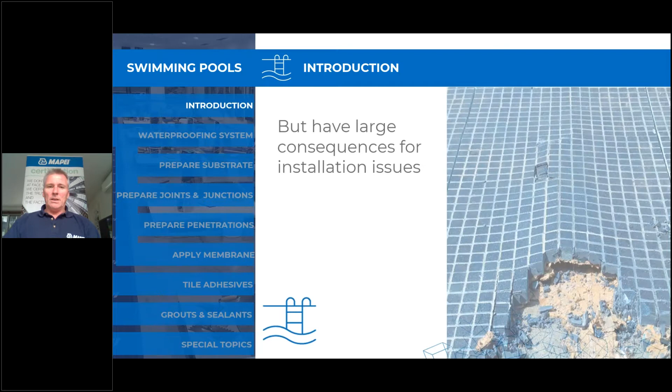If you do the pools wrong, there's certainly some big consequences to face. Not so bad in a backyard pool, but you can see this example here where the pool was done incorrectly in a high-rise or rooftop pool on the Gold Coast, and it flooded down 6 floors below. Many of the places were uninhabitable for the time being. So you can imagine the cost or the ramifications of having something go wrong.

You can imagine the ramifications even for us, having been involved in casino pools and hotel pools, or even residential towers. So if they go wrong, there can be certainly massive prices to pay.

We're going to cover off today the waterproofing system, then we're going to go into the tiling system or the tile adhesives. We'll talk about the grouts, we'll talk about the sealants that are used, the flexible sealants. And then we'll cover off just 4 little special topics that we thought were relevant to this series.

So we'll start off with the waterproofing system. The aim of the waterproofing layer is, of course, to prevent water from escaping from the pool. It prevents water from getting into the shell, where it can affect or corrode the steel structure. And it also can be put into place just for efflorescence control as well.

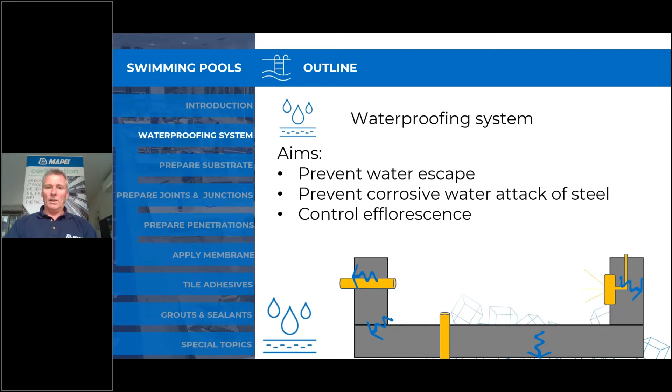So we'll talk about today in this area: the substrate preparation, the treatment of junctions and joints, the treatment of penetrations, and then the application of the membrane itself.

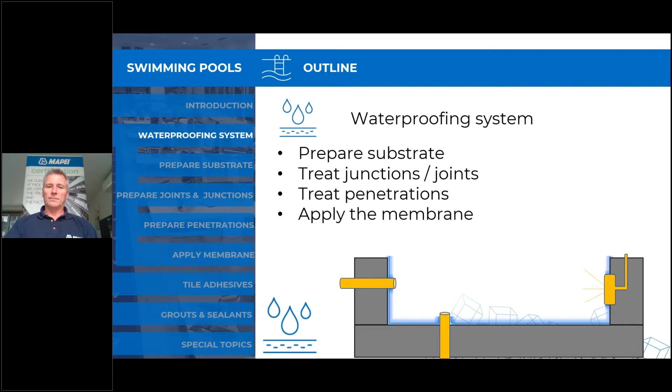In preparing the substrate, the concrete must be sound and well cured. There is various thoughts on the curing time of concrete. We work on the normal standard of 28-day cure time, but it does alter when we're talking about the big commercial pools, like the 50-metre pools and so on. So there is a variation - it can be 54 days for internal pools and 72 days for external pools. But we mainly work on the average of 28 days.

The preparation of a new swimming pool is obviously different to the preparation of an existing one. We remove all sharp edges or any kind of protrusions that's going to alter the thickness of the membrane itself - any rough concrete, concrete debris, anything where the membrane looks like it's going to have to go up and over, we certainly want to get rid of. High pressure water jet to remove any surface contaminants and also to provide the profile that we're after.

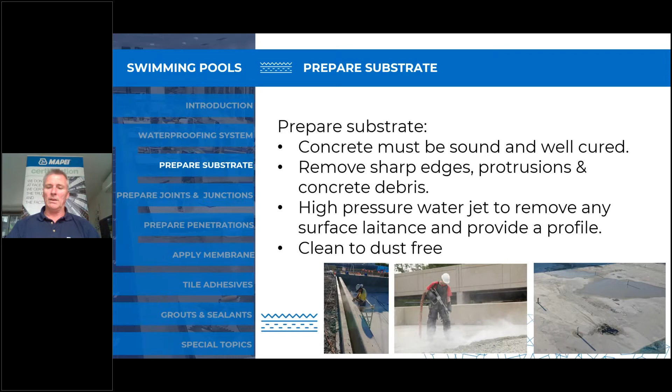And then the area should be made clean and dust free, especially when grinding has taken place. It's extremely important to make sure you've got the area dust free, because grinding can fill the pores of the concrete with a layer of dust.

So we would patch holes and smooth the substrate to allow for that uniform thickness of the membrane, as we said. We don't want to go up and over anything that's sharp, but we just don't want to go up and over anything anyway, because it alters the thickness of the membrane - where the membrane's transitioning on a flat surface and then has to go up and over, say, a lump of concrete or any other type of area where it's dipping down.

So if the existing tiles have been jackhammered off, in particular in the domestic scene, most pools are sprayed, so they're quite often quite an open surface that we're dealing with.

So the membrane, while it can go in and out and up and down and all over, it does alter the actual thickness of the product itself. So it's best to have a nice, smooth, plain surface to deal with. We'd smooth off with various different types of products. It can be done with sand cement render, of course, but in the bagged form we have a product, Planitop Smooth and Repair, or the Planitop Fast 330.

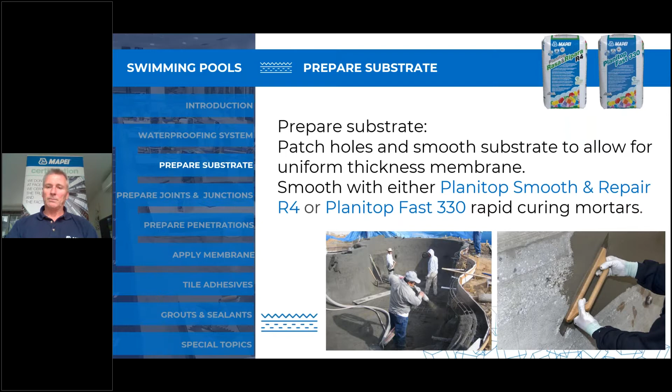When it comes to the floors, if we need to create a flat floor, quite often renders and or screeds are put into place to make the pool itself fit, or to have the tiles placed without too many cuts. Especially when using glass mosaics, it's a good idea to have the pool worked out as close as possible to getting a full tile in all areas, so we don't have any sharp edges of glass mosaics. Any form of tile can be sharp.

So we have our engineered screeds, again a bagged product, factory blended. We have the rapid setting version of Mapecem Pronto, and our normal setting version of the Topcem Pronto. So we render with the Smooth and Repair, and screed with these Mapecem or Topcem Prontos. The beauty of these products is they're factory blended, so we know we're getting a uniform blend every single time. A lot of the time with site blended renders and screeds, we're dealing with variation.

A traditional sand and cement screed or render finishes or dries up at around 12 to 15 MPa. With our pre-blended products, we can be anywhere from 21 up to 50 MPa, depending on the product you're actually using. So it's a stronger and safer recommendation to use the factory blended products, but pools have been rendered and screeded with sand and cement for many, many years.

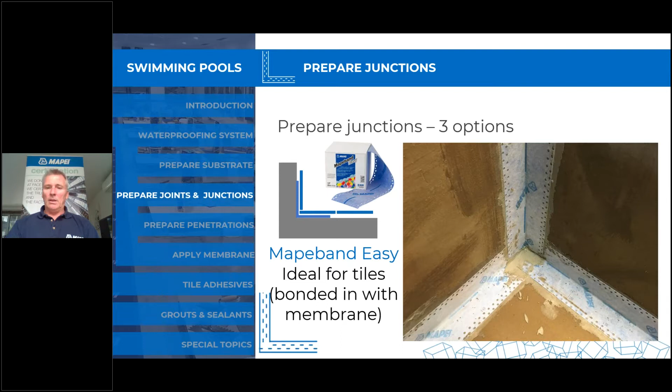The other option - I'll go through what happens a bit later - is the traditional way, using a polyurethane to create a cove fillet. That cove fillet should be around the radius of a 5-cent coin, so normally around 12 millimeters up and down. And then we would always put a fabric or some form of mesh into the first layer of membrane covering that junction, so we've got that bond breaker scenario going on.

As I said, these are the traditional way, but in a lot of cases when we're using a mosaic, either ceramic or glass, we need a tighter corner. So in modern times, we've got the felt type tape I talked about, that we can create a nice 90-degree angle with. But this method is still very much used, and when using a ceramic tile - the traditional pool tiles - they don't have to worry so much about getting tight into that corner.

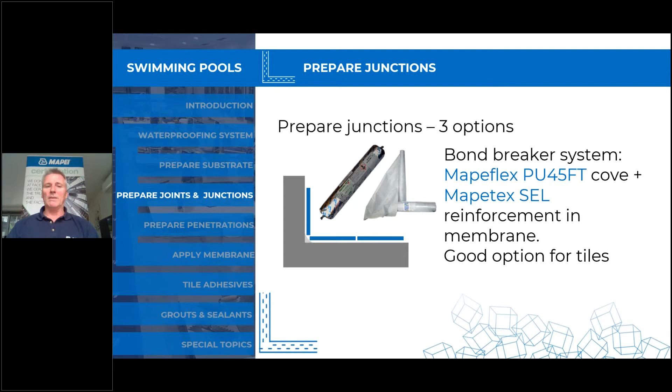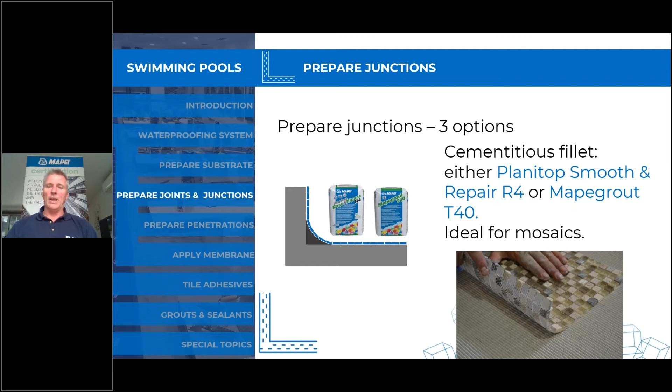The third option is really to create a cove with a cementitious product - that Planitop Smooth and Repair we mentioned before, or we can go into our construction grouts, the Mapegrout T40. This is ideal when they're using a mosaic and they don't want that tight look, the 90-degree look, where they want to actually cove the corner. It also helps the membrane transition more nicely into that corner - it doesn't have to change direction as such.

The felt tape we talked about, the Mapeband Easy, we also use it for dealing with movement joints. The less problematic joints are just the saw cut joints, and for those we use the Mapeband Easy. It's bonded into place using the same membrane we're using to membrane the swimming pool. That membrane is applied onto the structure, the felt is pushed into the membrane, and then we membrane back over the top of it as well, so it's sandwiched between two layers of membrane.

One advantage of this product is that it has a line manufactured into the center of it. It's a good idea to line that up with the saw cut itself and leave it exposed, so we know exactly where the saw cut is and can mirror it up into the tile work. You shouldn't be bridging control joints or saw cuts in any way - they should always be mirrored up into the tile work itself.

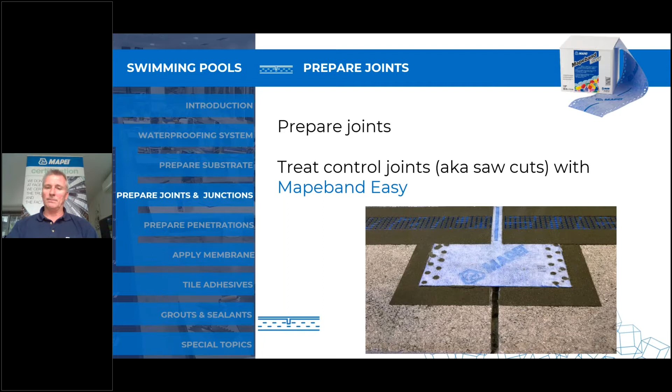Structural joints are a different thing altogether. They're a much more final joint - they allow for the whole structure to move. We deal with them in a different way.

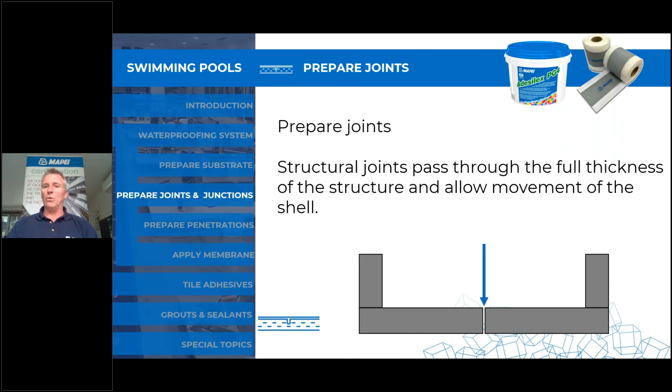We use what we call a gasket type tape - you can see it in that picture. It's called Mapeband TPE. It has a center made out of basically a plastic, very flexible, but we also loop it down into the movement joint itself, and it's locked into place with the Adesilex PG4 epoxy adhesive, as you can see in that picture.

In dealing with that, we prepare the joint, make sure it's nice and clean and free of any rigid debris, because there's no use doing all the detailing above the joint if the joint is full of debris and isn't going to move and act the way it should anyway. So it should be nice and clean.

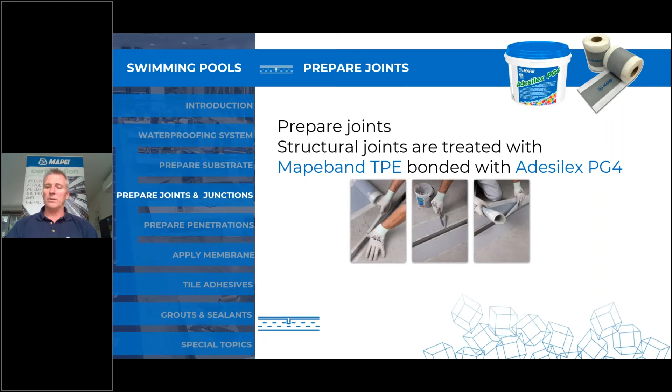We put the epoxy down onto the substrate, then place the TPE or the bandage into the epoxy - there's felt on either side. Depending on the movement that's anticipated, we loop the center down into the construction joint itself. The center of this tape is actually waterproof in itself, so we don't have to worry about that, but it has to control the movement that's going to take place.

As a rule of thumb, I always recommend that the loop in the center is twice the expected movement. So if we're dealing with a pool set on springs, and we expect it to drop 8 millimeters once we fill it with water, I'd expect that TPE to be looped down into that joint around 16 millimeters, so that it's never under tension.

So if the joint wants to open up, or the pool and the structure want to move independently, it's never actually stressing that tape itself. Then we put the epoxy over the top of it again, similar to what we talked about with the felt tape, sandwiching it between the two layers. In this case the epoxy, the PG4, and then we sand seed the epoxy so we create a nice keyable finish - sweep off the excess and you end up with a sandpapery finish that's nice and easy for the membrane or adhesive to bond to.

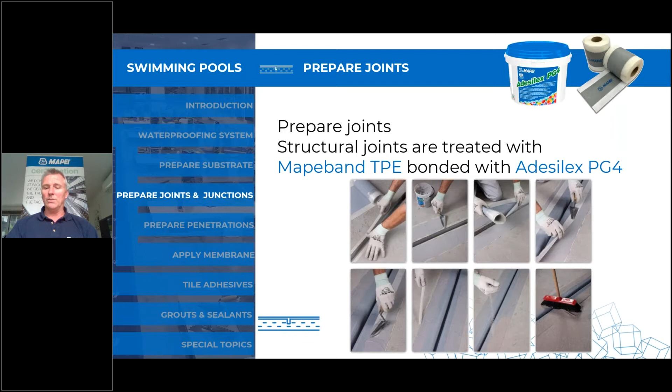When it comes to treating pipes or any forms of penetrations in the swimming pool, this is the major area where leaks occur. It's very rare that we have any leaking issues into the center of the pool or in the walls or anything like that.

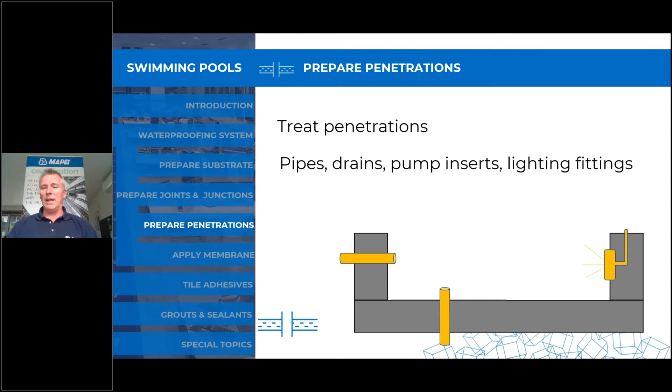Most often when we're called into a job to work out where a pool is leaking from, we lower it in stages, and we get it down to a penetration. Normally when we get it to a penetration - like the skimmer box, the jet pipes, the in and outtake pipes, or the lights in particular - that's normally where we find it. We'll talk later about how we'd retrofit or fix them, but for now we'll talk about how we deal with it - it's not good enough to just run the membrane up to the penetration itself. We find that a lot, especially in domestic situations.

They don't really understand the necessity of making the surround of the penetration waterproof before they actually apply the membrane. There's a lot of vibration and movement that takes place in these pipes, especially with the infills and also from the suction, so the water going through the pipe creates a fair bit of vibration.

There's also thermal expansion and contraction that takes place in both the structure and variations in water temperature. People have their solar heating on right through summer, then turn it off at the end of summer, and in winter we get a big drop in temperature, or vice versa when they come to use their pool for the first time out of winter and heat it up at a rapid rate. So there is that movement that's going to take place.

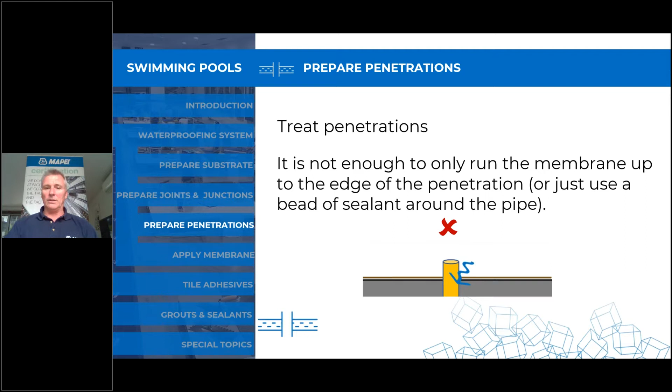So it's not good enough to just run the membrane up to it, but it's also not good enough to just put a bead of sealant. We find a lot of people literally think, I'll just put a bead of silicone or polyurethane around the pipe before I apply the membrane, and that's going to do the job. It's not. The polyurethanes in that exposed environment actually have a very short lifespan. The bond to PVC is quite difficult too, and the polyurethanes and silicones just aren't up to it by themselves. So we would never rely on just the membrane or a bead of sealant around the penetrations.

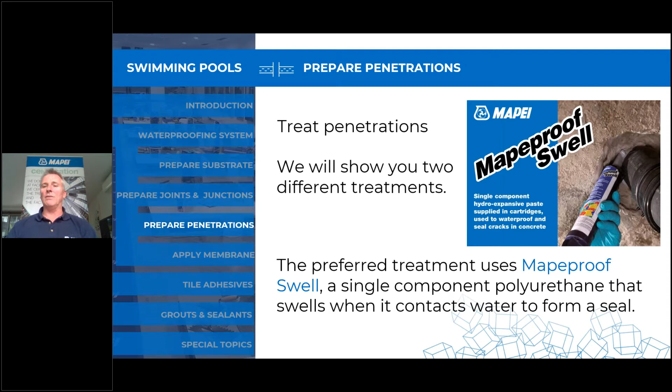We'll show you a couple of different treatments that we prefer. There's a stock standard that takes place in the industry, but we'll talk about the ones we prefer. Our preferred is to use something like a swellable product - the Mapeproof Swell, in this case. It's a single component polyurethane that swells when it comes into contact with water, creating an even tighter seal than just applying the product itself would.

To treat this penetration, if it's not cast in - a lot of commercial pools already have the pipes cast in, especially in floor penetrations, leaving that 80 mil or 60 mil depth around the pipe. It normally gets missed in the walls, but in the floors it's pretty much always there. Pool builders should understand they need to cater for this when forming up the pool. The best way is to put foam around the pipe, which can be removed later. If we were doing a retrofit fix, we'd have to break the concrete away to get back and create a seal around the pipe.

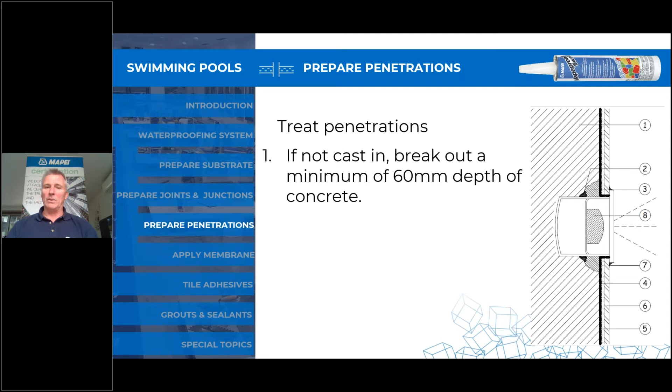Because this product does swell when it meets water, it needs a certain amount of cover of construction grout over the top - 60 mil is the normal depth we talk about. We would gun the swell into place, then prepare the pipe: abrade it, give it a light sand, then prime it with an epoxy, best to sand seed that epoxy as well. You literally paint the epoxy on and rub sand around the pipe to leave that sandpaper-type finish, and then fill the area with some form of grout or repair mortar.

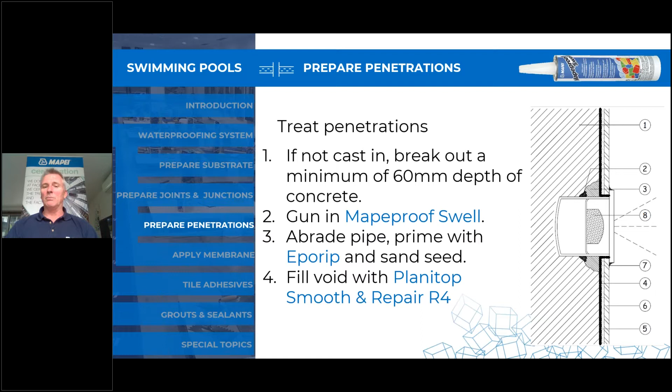So the Planitop Smooth and Repair - we've already used that product in patching up the shell itself. Then when we bring the membrane up into that area, like in any application of a waterproofing membrane, wherever something meets something we should reinforce the membrane. So we put a fabric or netting into the membrane - the Mapetex SEL or Mapenet 150 - into the first layer of the membrane.

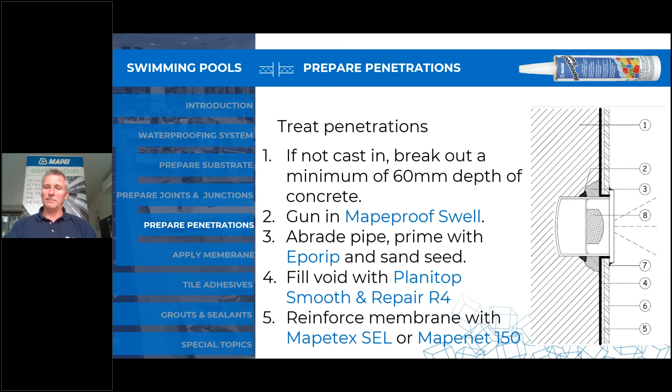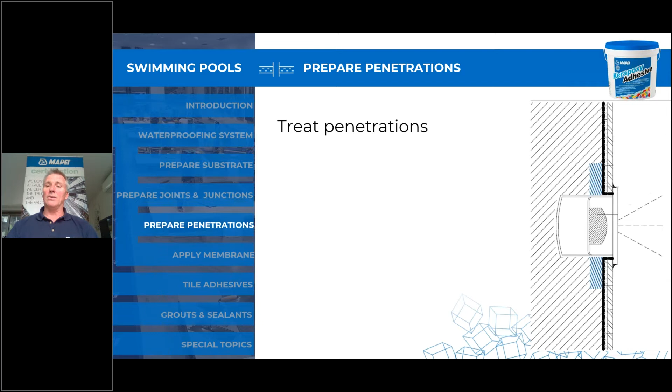The second option is probably more commonly used, where there's a smaller void around the pipe itself. A lot of people just do the finger - a 10 mil gap or indentation into the concrete around the pipe. But it should actually be bigger if you get the chance to set it into the casting situation. We recommend getting back to around 30 millimetres deep and 50 millimetres wide. That offers us, one, strength in the epoxy, and two, a bigger area that we can actually lap the membrane onto the epoxy itself.

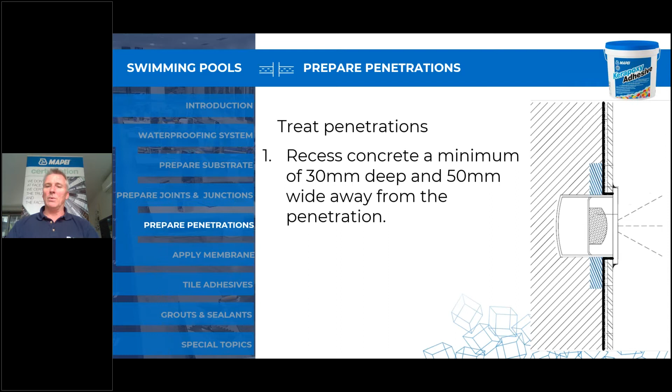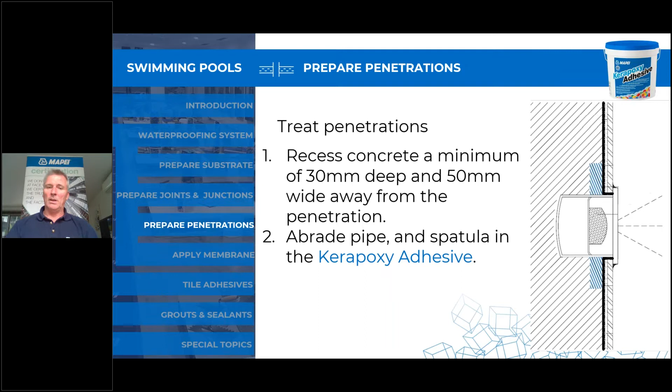Again, we would abrade the pipe, and then we would spatula or force the epoxy into the area so it's nice and compact, creating a really nice seal around the pipe itself. Then we bring the membrane up onto the epoxy, and it becomes a junction. So where something meets something, we would reinforce the membrane with either a fabric or a netting.

Then it comes to the actual application of the membrane. Our go-to membrane for swimming pools is without doubt the Mapelastic Smart. Mapelastic Smart's been in Australia for about 21, 22 years, and we have literally done hundreds of swimming pools, from commercial to high-rise to public to private, you name them, we've done them. So it's got a really extensive track record. My own swimming pool is certainly waterproofed with Mapelastic Smart.

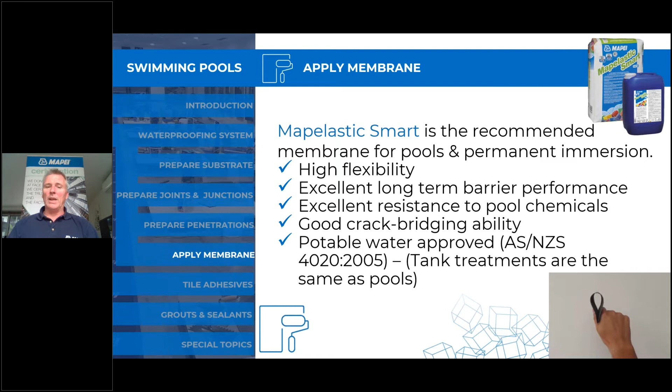So always apply a minimum of 2 coats. There is just no two ways about it. We have many people over the years come to me and tell me how they love the product because they can do it in one application. It's never acceptable. 2 coats is always what should be applied.

The reason being, there's always pinholes in the first coat of membrane. If we get a magnifying glass out and look at a first layer, there's always little pinholes in it, and it's hard to get the exact required thickness that we actually want. We want the required thickness because it makes the membrane function the way it's actually been designed to. So a cement-based product should be a minimum of 2 millimetres thick.

Always follow the drying times. It's the other thing that gets put to us a lot. Can I go over it while it's semi-dry? No. Can I start applying membrane, finish one end and go back to the other? No. You've got to wait for it to dry properly.

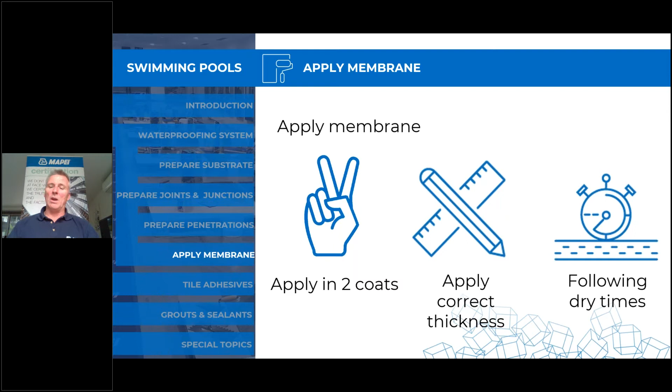Normally, in a normal scenario, it takes around 3 hours to dry the first coat, and then we would go back and follow it up with the subsequent coats. So as I said, always apply 2 coats. When the first coat goes down, it's still allowing vapor to transfer through it, air traveling through the first coat, but vapor in particular will create pinholes.

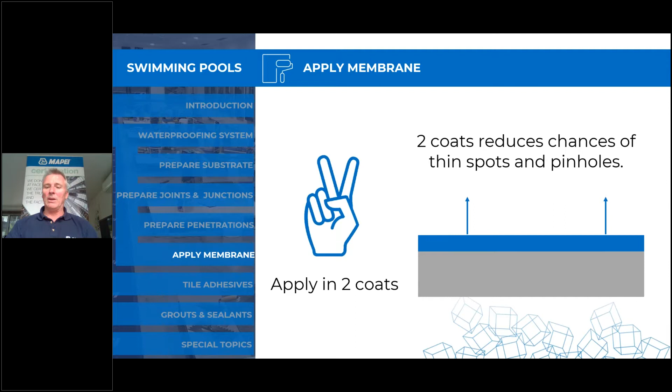If the surface preparation is not done perfectly, if there's any dust, then pinholes can form. There's no doubt about that. So the second coat reduces the chances of pinholes, and it also creates the true film thickness that we require. It's recommended to reinforce the first coat of the Mapei membrane with either Mapenet 150 or the Mapetex Sel.

It's recommended, it's not compulsory. We don't do it in all swimming pools. We certainly highly recommend it in high-rise swimming pools where we're expecting movement of the building. We also highly recommend it in some of the larger public swimming pools where they're subject to a lot of sun exposure, dealing with that thermal expansion and contraction.

So the membrane not only does what we talked about before, stopping the water from going anywhere, stopping the corrosion, acting as an efflorescence barrier, but the membrane can also act basically like a skin, a bit of a bridge between the adhesive and the substrate itself. It allows for a little bit of extra movement. It's not what we rely on, but if it is in place, it does allow for that extra movement.

The reason we talk about the Mapenet 150 or the Mapetex Sel is that it strengthens the membrane dramatically. As much as I love Mapelastic Smart, it's one of my favourite products out of the 5,000 products that Mapei have, mainly due to the fact that here in Australia we were involved in the recommendations of altering its predecessor, the Mapelastic, where we changed the ratios a little bit. Instead of being 3-to-1, 3 powder 1 liquid, the Mapelastic Smart is 2 powder, 1 liquid.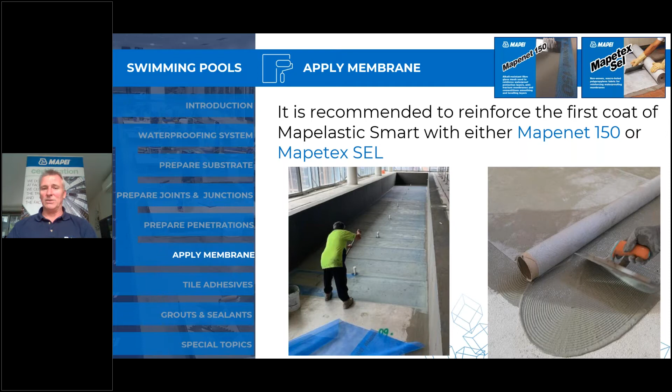That's in critical areas around pipes or at junctions, floor, wall - we strengthen the membrane there. But in my opinion, to put the mesh right throughout the whole layer of the membrane just gives you one big, long, strong membrane itself, so it could actually detach and still stay in place. I've seen it many times where it's detached because of lack of substrate preparation, but they still couldn't get it up because it was just locked in with the mesh itself.

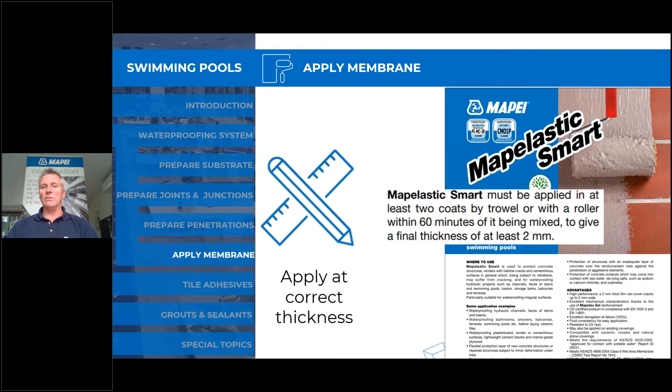Applying the correct thickness - it's written on the data sheet that we should be at least 2 millimeters. There's just no two ways about the fact that these people, who are a hell of a lot smarter than me, develop these products. We just gave an idea, but the development of the product is done by the chemists, and they make it go in at a certain film thickness so it performs the way it should perform in accordance to the data sheet. So the continuous film thickness is probably the most important aspect, but for it to function the way we want, we do require it to be at the required film thickness.

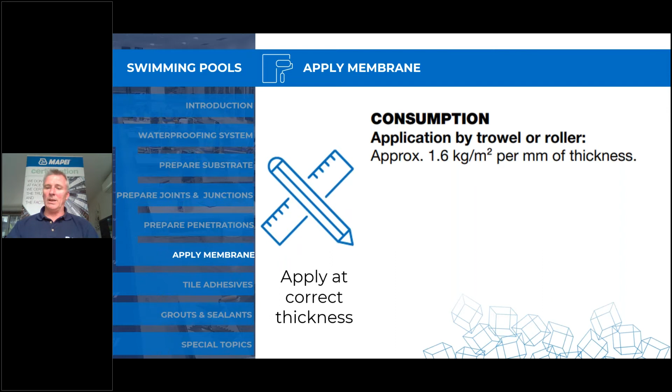The consumption of the Mapelastic Smart is around 1.6 kilograms per square meter per millimeter of thickness. This can be measured within a wet film, in its initial stages, by using a wet film gauge. If you haven't seen one of these before, it's got teeth on the gauge. It's pushed into the membrane, and when you have a look at the teeth, when you pull it up, the last tooth that's got membrane on it has a marking on it, which will let you know the thickness that you've actually got to.

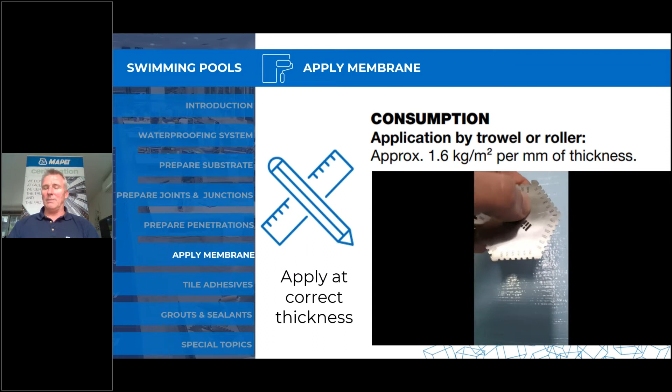It's commonly used - not commonly enough as far as I'm concerned, but it is commonly used. The one beauty of using the Mapenet or the Mapetex is that we actually create film thickness, because we're putting something in there that needs to be hidden. So if we walk onto the job and we can still see the fabric, we know they haven't got the required film thickness.

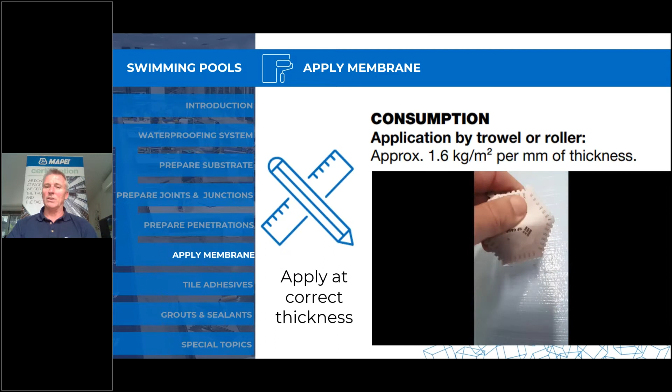Of course, the other way to test the film thickness is to do the dry film thickness test, where literally a square or a piece of the membrane is cut out and then measured with some vernier calipers. But a wet film gauge is a nice simple way to actually work out if you're doing the correct thickness in the process as you're going. It can actually be altered while you're going, because once it's dry, it means you've got to do another coat. But if it's still in the wet state, it just means you might need to add some more product.

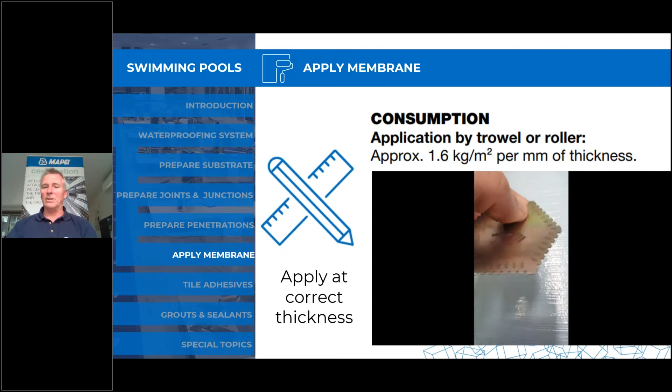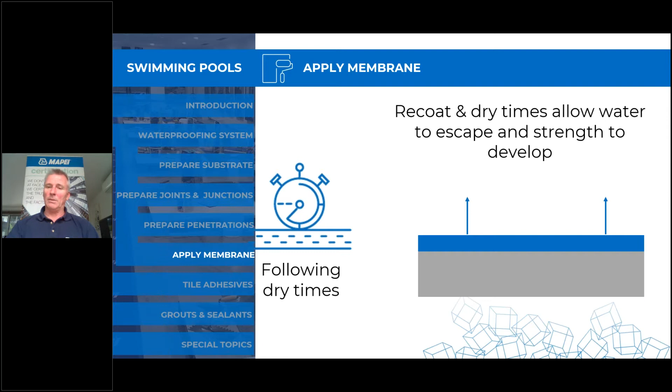We do keep a lot of projects actually going in the rainy or colder months by having the ability for Mapelastic to go on to a damp or moist substrate. But yeah, the two coats - I can't stress it enough. So the dry times that we talked about, as I said, these products are developed in a lab. The guys in there, the people in these labs, they stay in areas that are always kept at a constant 23 degrees and 50% relative humidity.

So the drying times can alter when we're out in the real world. So when we're in a windy area, for instance, or lower temperatures - and I don't just mean the air temperature, I mean the structural temperature. Sometimes the ambient temperature can be 10 or 15 degrees, but the structure itself might still be at 6 or 7 degrees.

We've had plenty of phone calls where they've said, 'I've put Mapelastic Smart onto my pool shell and it hasn't dried in the 3 hours,' and I say, well, have a look outside, it's 5 degrees, so give it a chance. Those dry times are based on 23 degrees and 50% humidity, so they will vary depending on the conditions you're actually working in.

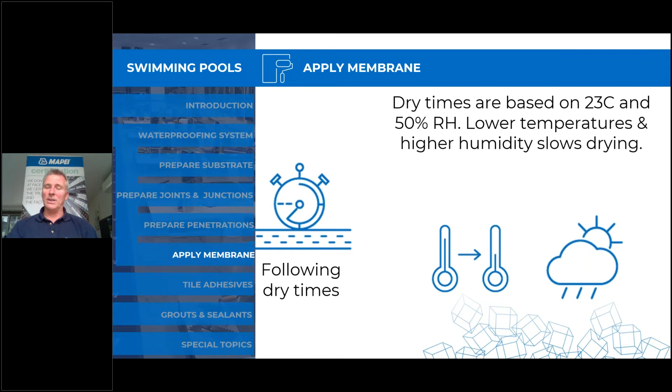So in the scum gutter, we step away from Mapelastic Smart if it's not going to be tiled. Where the membrane is going to be left exposed, we step into a product called PlaniSeal 88. A lot of people would have known this product as Idrosilex Pronto. Again, it's been used for well over 20 years.

We always use this where we have areas that require a higher wear resistance - in other words, with the water that's constantly flying around the scum gutters. Remember, it could be hot water, it's got chemicals in it, it might be salt water - it could be all sorts of different types of water. We would always step into the PlaniSeal 88 or the Idrosilex Pronto.

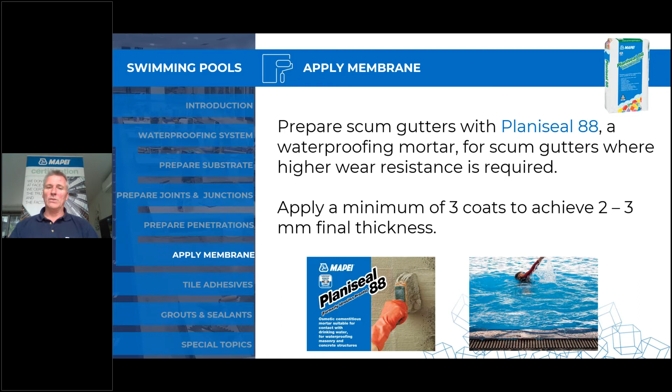I think a minimum of 3 coats, but we do want to achieve that 2 to 3 millimetre final thickness. I always say to people that 2 coats is going to be enough, but the third coat is just the protection coat - it acts as the wearing layer itself. So I always recommend in those exposed areas to step up into a 3-coat application.

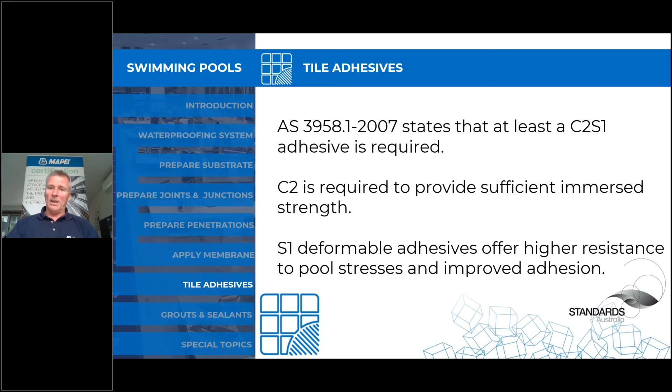So in our range, in the regular setting products, we have the Keraflex Maxi, Ultralite, and the Kerabond Plus liquid, the latex isolastic. And then into the rapid setting products, we would go to KeraQuick or KeraQuick Plus Latex Plus.

I always recommend and talk to a lot of pool tilers or pool builders about the use of a rapid set product, at a minimum, to do your stairs and the floor of the pool. We are dealing with tiles in swimming pools that have a low absorption rate - in particular, glass mosaics, for instance, that have no absorption at all. So the adhesive can't dry by having the water come out of it via the tile, and in most cases, we've got the waterproof membrane.

So it's sitting between something that's non-porous and sitting on something that's non-porous, so the drying times can be prolonged, greater than what's specified on the bags or data sheets. So I always recommend using rapid sets for steps and pool floors, so they know when they've laid those areas and can come back to traffic them the following day. The adhesive, being a rapid set, is close to full strength after 6 hours. It's not quite at full strength, but it's certainly much higher strength after 6 hours than a regular setting product.

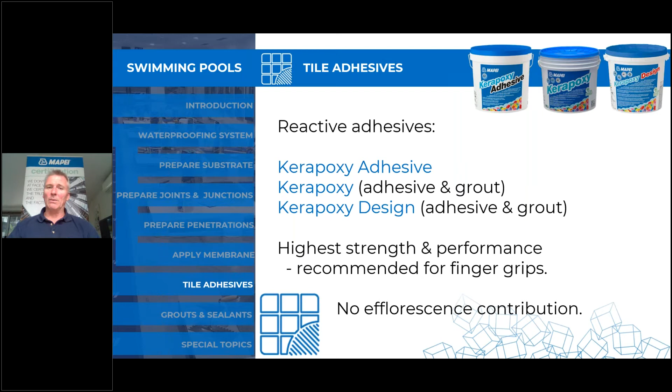The next level up is our reactive products, so our Kerapoxy range - the adhesive or the grouts can be used as both adhesive and grout. They're the highest strength and performing products, so highly recommended for finger grips in commercial pools. Most finger grips are quite small, so there's a small surface area that we're trying to bond that finger grip to the structure itself. They're in areas where they suffer the most because they're pulled on, stepped on, and dived off - they really are in the harshest part of the pool. And being an epoxy, they don't contribute to efflorescence at all, since there's no lime in them, which I'll talk about when we discuss an efflorescence-free system in a minute.

When it comes to adhesive coverage or contact in a swimming pool, we require a minimum - and remember the standards are a minimum - of 90% contact. The reason is we want as little voids behind the tile as possible. Voids behind the tile are areas where water and air can accumulate, and that water and air can expand and contract when subject to heat or cold, which puts pressure on the system. Also, excess water sitting behind the tile contributes to efflorescence that can take place. So it says a minimum of 90%, but realistically we'd like to try and get as close to 100% as possible.

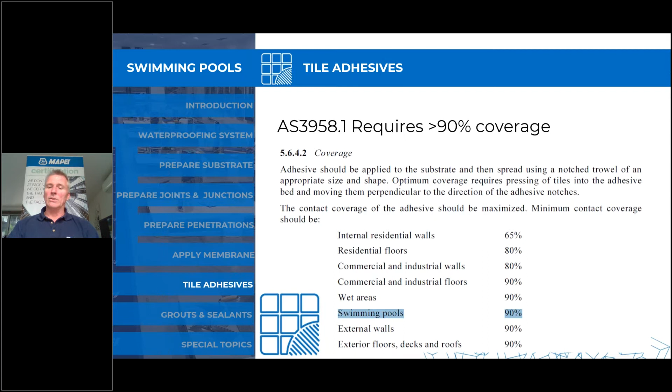To achieve that coverage, we would always use the appropriate size notch trowel. In other words, if you've got traditional 250 by 125 pool tiles, let's not use a 3 or 4 mil trowel. If you've got tiles even in the glass mosaic range that are 10mm thick, step up to a 6mm trowel - we work out the appropriate trowel size. The best way to check is to spread some adhesive, push the tile into it, pull it off, and have a look to make sure your coverage is what you require.

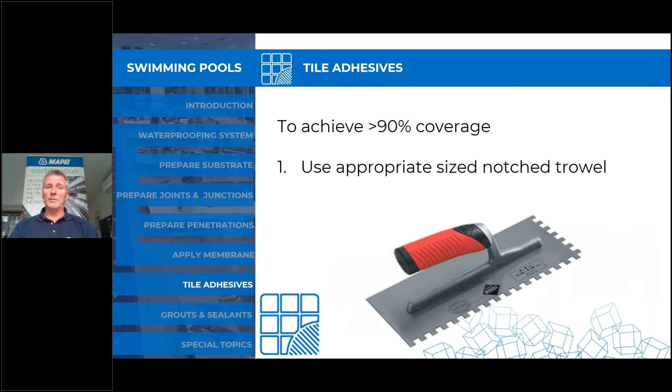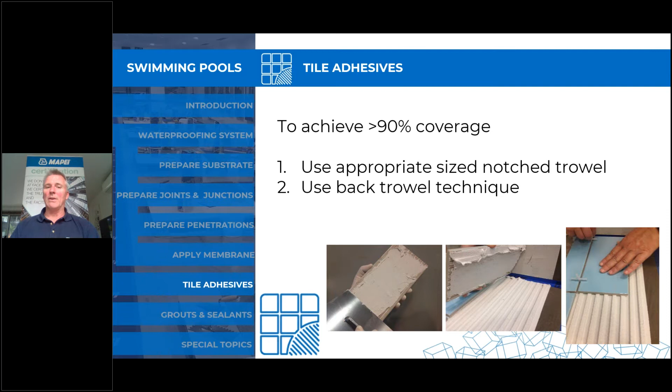Use the back trowel technique if you've got extruded or ridgeback tiles - they should be filled. You can see by the way the adhesive is spread with a notch trowel, if you've got grooves on the back of the tile and they don't line up properly, there's every chance you'll create voids behind that tile. So if they're extruded or ridgeback tiles, they should be back buttered without a doubt. When you push the tile into the adhesive, it should be worked in to close those ridges up - that's what it should look like when you pull the tile off.

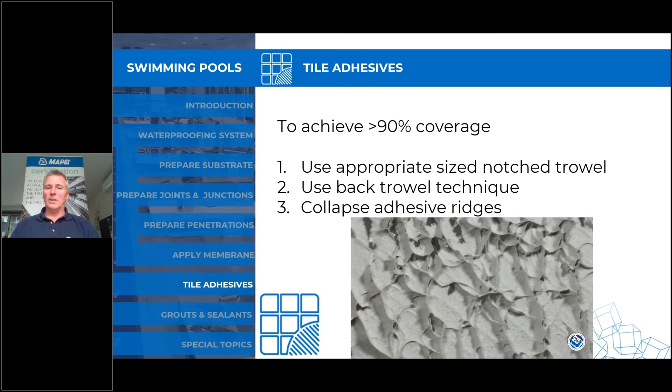You can see with this glass tile, the adhesive should be spread in one direction, and then we move the tile across the ridges to close them up. If you move them with the ridges, you're just going to go with it. So if you have the adhesive spread in all sorts of directions, then which way do you actually push the tile to close up those ridges?

In most cases, it's the easiest, most efficient way to spread the adhesive across your body, so that when you push the tile into it, you push it away from your body and pull it back, and it will close those ridges up.

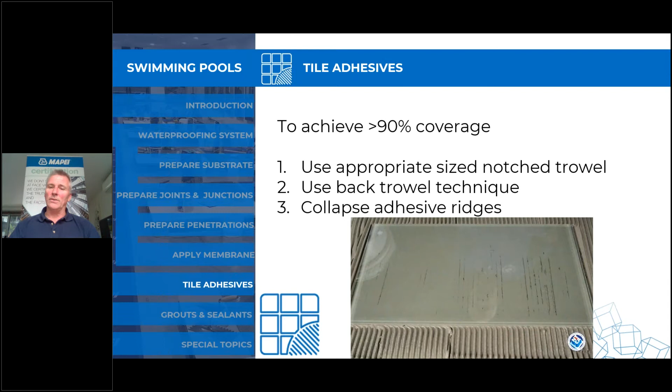We do this demonstration a lot in our schools around the country, and a lot of tilers are very surprised when they see this glass tile demonstration to see what happens to adhesive when they actually bed it in there. It's surprising how many tilers don't understand about bedding tiles into tile adhesive.

So we'll move on into the grouts. The recommended grouts, we do recommend cementitious products. These, in our standard range, the Keracolor range, the FF and the GG, they do contain lime. So if you are looking for an efflorescence-free system, we certainly wouldn't go into using these products.

In most cases, depending on the pH levels or the chemical level of the swimming pool, even when using these products, efflorescence is not an issue. But if an efflorescence-free design is required, then we would certainly step up into different types of products.

So when it comes to just the grout, we would go into our Ultracolor Plus. It doesn't contain lime, so it cannot contribute to efflorescence at all. And it comes in all 37 colours as well, where the Keracolor only comes in 12.

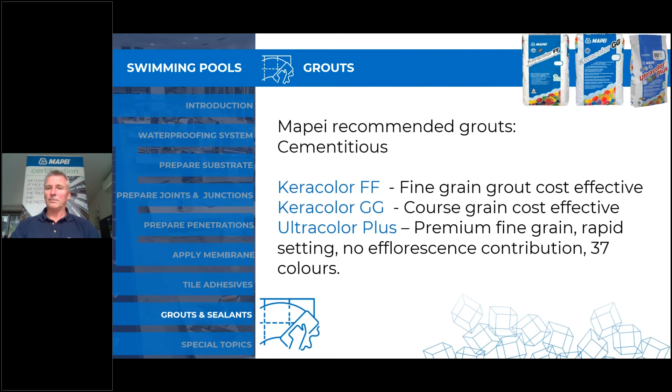The other level again with the grouts is the Kerapoxy Design. They have the highest strength or performance levels. They can be used as adhesive and grout because it comes in 30-something colours. So if you've got a translucent, relatively see-through glass mosaic, we would recommend using the same colour, or a white, so it's not going to alter the end look of the mosaics. They're highly acid resistant, and they don't contribute to any form of efflorescence because they don't have any lime in it. So internally or externally, it doesn't make any difference.

We highly recommend the use of Kerapoxy as the grout. You can lay in a normal traditional adhesive, but use Kerapoxy as the grout when we've got spillover walls, exposed feature walls, and spas. The spillover walls or exposed feature walls are subject to thermal expansion and contraction, so there's more pressure on the system, and the epoxy adds strength. The abrasiveness of water running over a spillover can wear away a normal grout eventually, but it won't with the epoxy.

And in spas, there are such fluctuations, in particular hot temperatures that we're dealing with. It often relates to sun exposure, so heat, or the water heat itself. But we highly recommend the use of epoxy grout in those three scenarios.

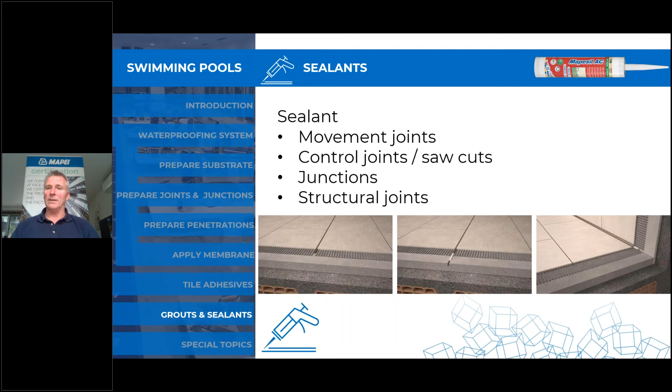That joint should be totally free of adhesive or any other form of rigid debris. If they are deep, they should be foam filled, or a foam backing rod put into the joint. The silicon should only really be a maximum of 10 mil deep. If it's deeper than that, it should be filled up with a foam backing rod prior to adding the silicon itself.

We certainly recommend our Mapesil AC because it's a premium pool grade silicon, 100% pure silicon. It's available in all the colors, of course, but the reason I mention pool grade is because normal silicons just aren't up to handling the pressure or the degradation that can take place when we're dealing in that harsh environment, the pool chemical water. So definitely always make sure you use a pool grade silicon.

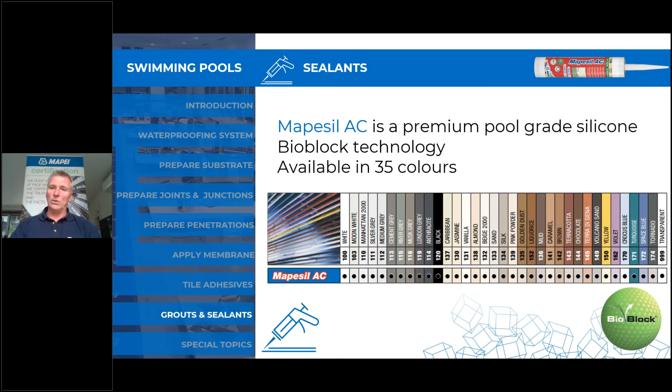One thing I'll talk about with sealants or silicon joints is the fact that a lot of people overlook their importance, especially in larger swimming pools. I'll talk about it a bit further, but I'll just mention where movement joints should be.

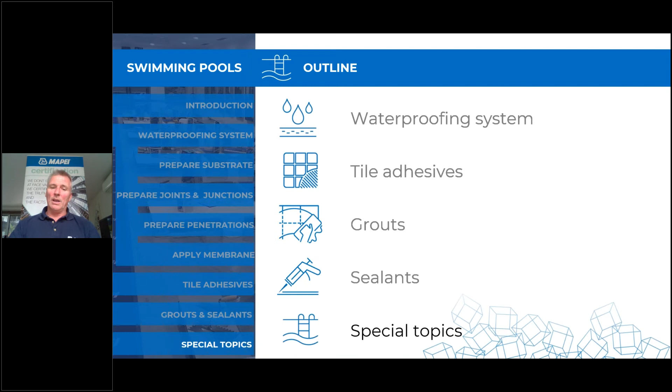Just a few last things into the special topics that we talked about. One is dealing with negative pressure, so pools when they're cut into the side of a hill, into areas governed by or dealing with tidal water movement, that type of stuff. When we're dealing with water that's coming from behind the pool, it's very important to treat the junctions and the pipes for negative pressure.

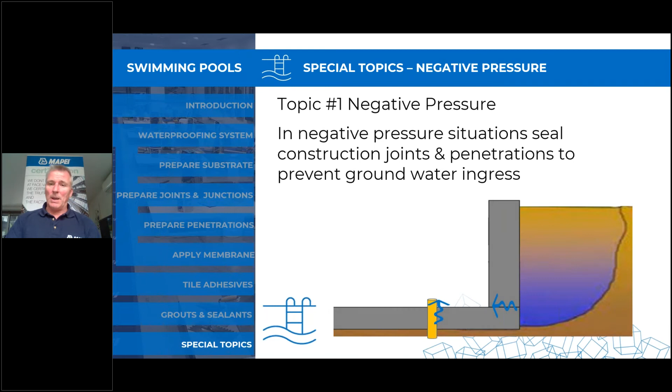So we would step up into making sure the construction of the pool is right. In new construction of the pool, we would use our Idrostop, which is a swellable tape, or a swellable form, that's placed in, always put behind the steelwork, because these swellable products, as I mentioned before, when they take on water, they swell to create the seal.

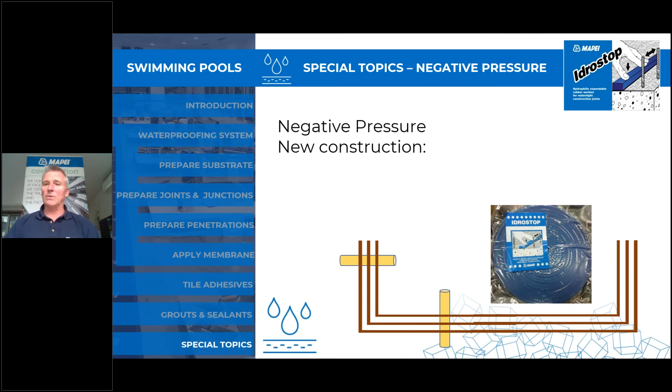This is certainly powerful enough to blow the concrete out, so it should always be placed behind the steel, wrapped around pipes, and running alongside construction joints. You can see in that picture there that it's placed behind the steelwork, so that it's creating that seal without putting pressure onto the face of the concrete itself.

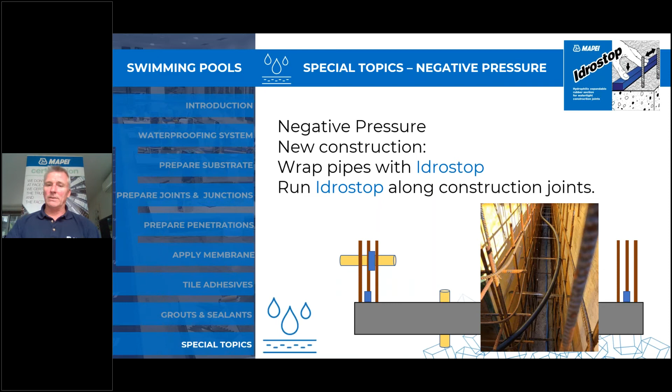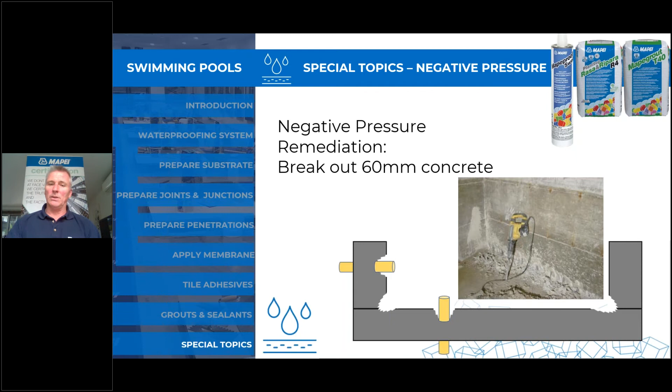With remediation work that we talked about before, if you've got water coming in from behind or around a pipe, from underneath, or from out the back of the pool or the side of the pool, we would get that 60 millimetre breakout again. So we break out 60 mils of the concrete, gun in the Mapeproof Swell, and then we repair with that rapid setting or the structural grout we were talking about before.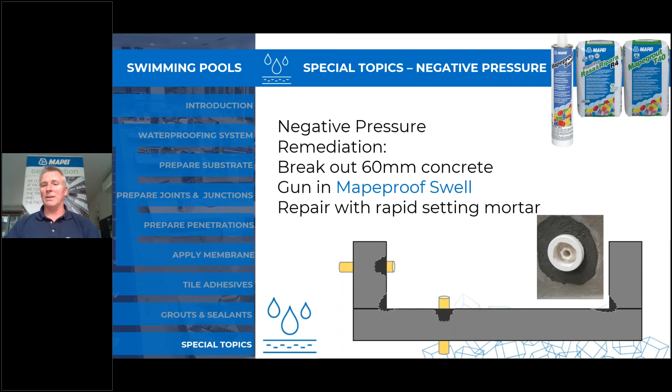We go with the rapid setting mainly because it can just keep the process going. These products dry very quickly so that we can get in and put the membrane in place.

Efflorescence, now this is a huge topic that we deal with a lot. Those efflorescence-free systems that we talked about, they do cost extra, and a lot of people don't want to pay the extra. Quite often we're only talking a few dollars per square metre. Most domestic pools can be anywhere between 60 and 100 square metres, so you might be talking about $2 a square metre or less.

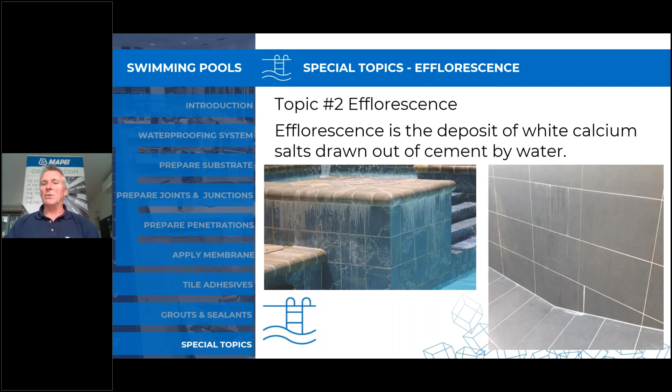It could be $1 a square metre to use a different type of adhesive, so a rapid setting or a two-part adhesive as opposed to a single-part regular setting adhesive. If you think about $1 or $2, even if it's $2 a square metre, even $3 a square metre, and you've got a 100 square metre pool, that's $300 to reduce this type of look from taking place.

The other thing that we do is protect the substrate itself. People tiling, especially in domestic areas, a lot of times the membrane is not utilised, so they've got water sitting in the structure. If they've got a screed or render, water sitting in the screed or render. There's lime in the concrete, lime in the screed or render, lime in the tile adhesives and lime in the grout. There's a very high possibility that you're going to have an efflorescence issue down the track.

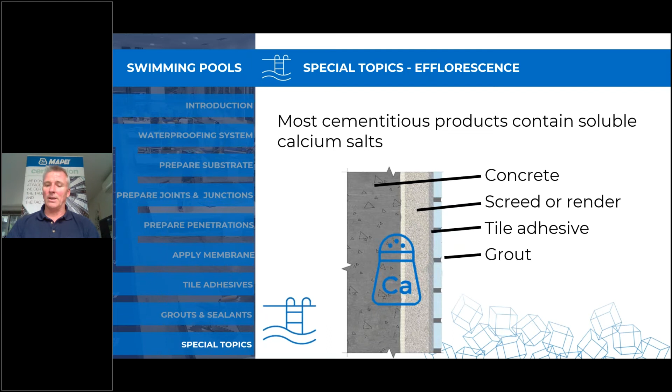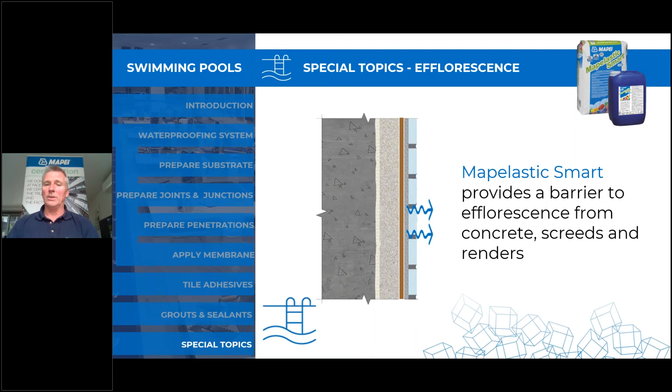So if a membrane is to be used, we would certainly put it as high in the system as possible, immediately behind the adhesive, so we at least stop the water, or stop having to deal with the water and the salts that are in the render or the concrete. The higher it is, the better it is, there's just no two ways about that.

And then we would go into adhesives and grouts that don't contribute, that don't have lime as such, or they've got a controlled lime situation into it. So our Granirapid, as I said, the two-part, the Kerabond Isolastic, Keraquick Latex Plus, Kerapoxy is the grout, and then the Ultracolor Plus is the grout. So we do have those systems.

Quite often, if you are just using Ultracolor as opposed to Keracolor, it can be as little as cents per square metre. In most cases, the cost variation between the Ultracolor and the Keracolor can be three times the cost, there's no doubt about that. But the reality is the cost of a grout is very cheap in the initial.

Likewise with the adhesive. With the adhesive, in particular behind a glass mosaic, we're getting 10, 12 square metres out of a bag, so we're not talking sheep stations here. It's quite often cents, or $1, $2 or $3, even if it's $5 a square metre, $500 over a pool that's worth $60,000 or $70,000. To me, it's a no-brainer, it should be spent.

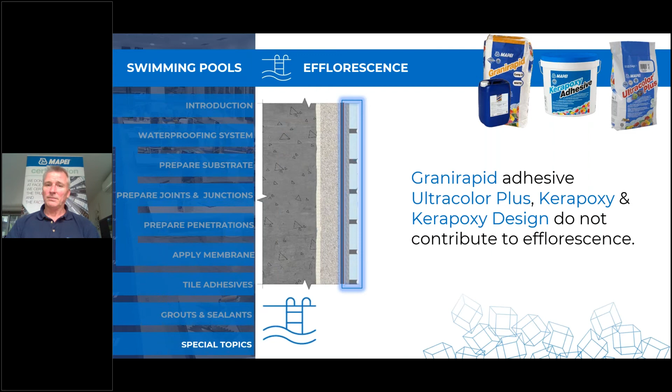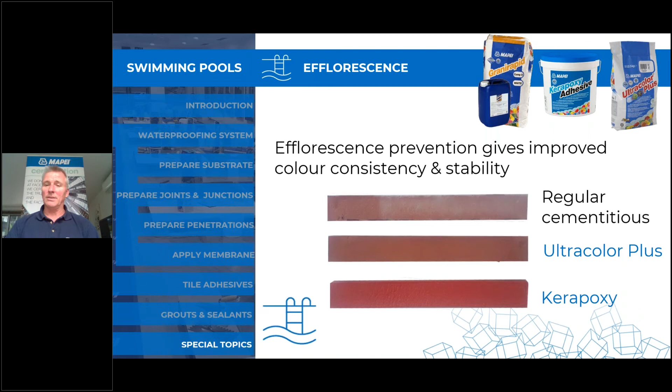So the efflorescence, that's the effect it can have on the grout, it alters the grout very quickly. And realistically, that's probably the least of your problems, because when it starts dribbling down the walls, that's when it becomes very unsightly, and people kick up a fuss about it, of course, as they should.

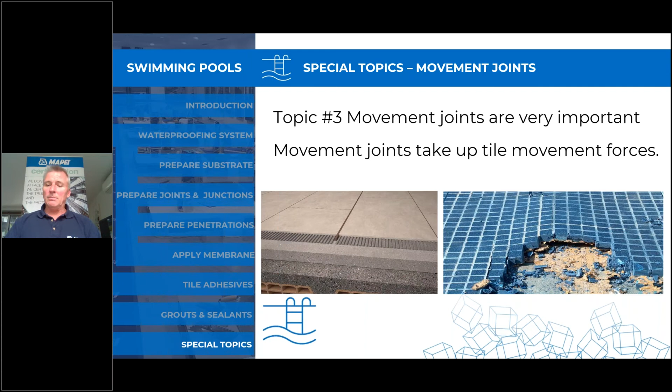On movement joints, as I said, I was going to touch on where we place them and how we place them. They are there for a reason, and in accordance to the standard, they should be incorporated in a pool. They should be at the perimeter. So if it is a square edge swimming pool, it should be at the wall floor junction, at the wall junction.

It's different with a lot of the sprayed pools, because they're rounded off, so it's not really a junction as such. In particular, the joint that's forgotten the most is between the pool tile and the coping tile.

More often than not, it's grouted, and people wonder why they have waterline tiles bulging and coming off the wall, or they have their coping tiles that have gone drummy and detached. A perfect example is a swimming pool that sits in on a 35-degree day or a 30-degree day, and it's got a nice black or stone coping tile around it that's sitting up there at anywhere between 50 degrees or greater.

Then the kids come home from school, jump into the pool, the splash comes out, hits those coping tiles, or even the water that's lapping up onto the tiles above the water level. There's a rapid thermal change in those areas, so that thermal movement takes place rapidly, thermal shock can take place. It's also just the difference of the constant temperature in the pool versus the variation of the temperature of the stone or tile in the surround or above the waterline.

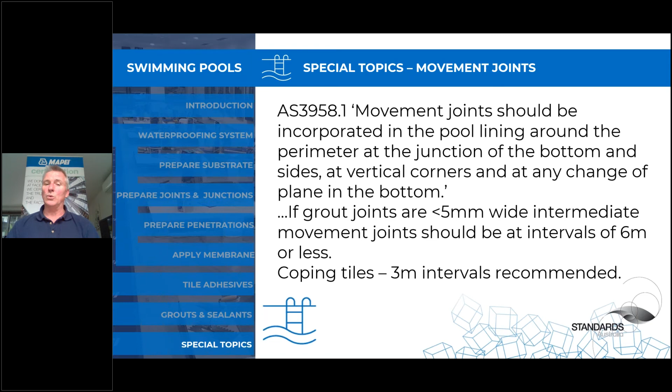After the installation, a lot of things that we deal with is aggressive cleaning, which can happen in two different ways. It can be high pressure water blasting the pool immediately after the grouting's finished, or the day after. Especially if you're using regular setting products, the pool should be left to stand for those products to cure, to get to their maximum strength before we start hitting them with high pressured water. Pools really should be tiled with a canopy over the top, so they're protected from the environment whilst everything's drying, because their life is going to be in a harsh environment, so they should be protected.

The other concept of aggressive cleaning is the use of aggressive acids, so high strength acids like hydrochloric acid, spirits of salt. Not only are you causing degradation of the grout and possibly the adhesive and possibly the membrane as the acid goes further into the system, but you're also adding salt into the system as well.

A lot of people go to the trouble of using certain aspects of the efflorescence-free system, but then they go and wash it with an aggressive acid or hydrochloric acid or spirits of salt, and they put salt back into the system. People often say to me, 'I use it at 10 to 1 or 20 to 1, and then I dilute it by washing it all off.' But the reality is, in most cases, you're applying the acid to a porous surface or a porous product.

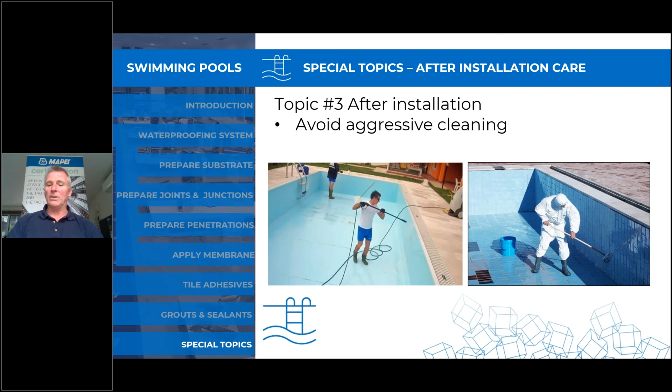So the other thing is avoiding filling the pool too early.

So as I said, even when it comes to cleaning, a lot of times the cleaning's done and the bottom of the pool's already got 5 inches of water into it.

Avoid that. We want to leave it empty for a minimum of 4 days, but even up to 21 days. It's even stated in the Australian standards itself to let the pool sit for a few weeks before you go filling it.

Filling it should be controlled so the levels are risen slowly. It says 750 mil every day, but most people fill them in 24 hours or 8 hours and the pool's full, which puts the whole system back under pressure again.

And likewise, when it comes to heating the pool, we heat it at a slow rate for the first time. Once it's done that thermal movement, it's no big deal. It's like having heating in your bathroom floor. When you heat it for the first time, you heat it gradually just so you don't get that thermal shock that's going to take place.

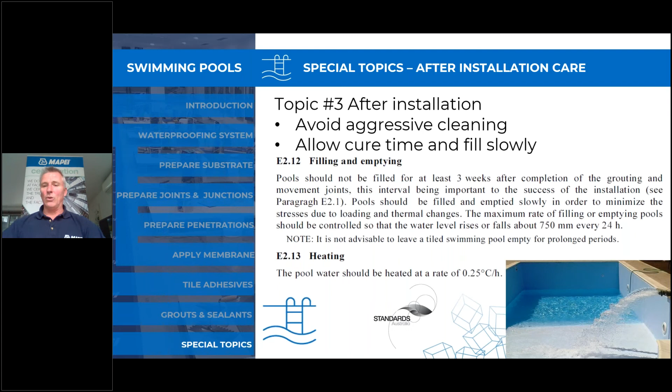So in particular when we've got narrow or shallow grout joints, mosaics, a lot of the time they're 3 mil deep or 3 mil thick, and you might have 1 millimeter of adhesive already up into that grout joint. So you might have 2 millimeter grout cover, and then you go and hit it with acids. It can be, and will be, problematic. There's no doubt about that.

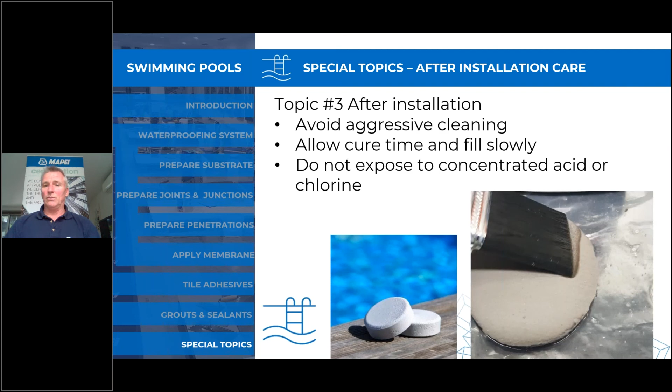We often have people ring us up and say, 'Oh, my grout started off as grey and now it's light grey, why?' The first thing I say to them is, what did you wash it with? So just avoid the aggressive cleaning. Allow for cure times—it's a really important thing to allow for that cure time to take place.

So the resources that we've got available to everyone on our website are our work method statements. They've got pretty pictures and also a step-by-step guide. We talk about everything from substrate preparation right through to the finish of the movement joints in those work method statements. A really handy resource, available for free on the website. It's a good thing—we try and teach contractors to use these things when they are pricing, so when you give someone your price, you can hand them a work method statement with it.

We can even customize these into a short form specification, so it enables you to justify that you're more expensive than Joe Blow because this is the system that I use. In that system, it talks about good, better, best products, and you can say well I use the best products the whole way through my system. That's why I'm $5 or $10 or $50 a metre more expensive than what Joe down the road is. So we teach people about doing two-tiered prices, and we even talk to builders about accepting two-tiered prices, giving the client the option to say okay, I'm happy to accept Joe's price, but I would prefer Johnny's price because he does use these products.